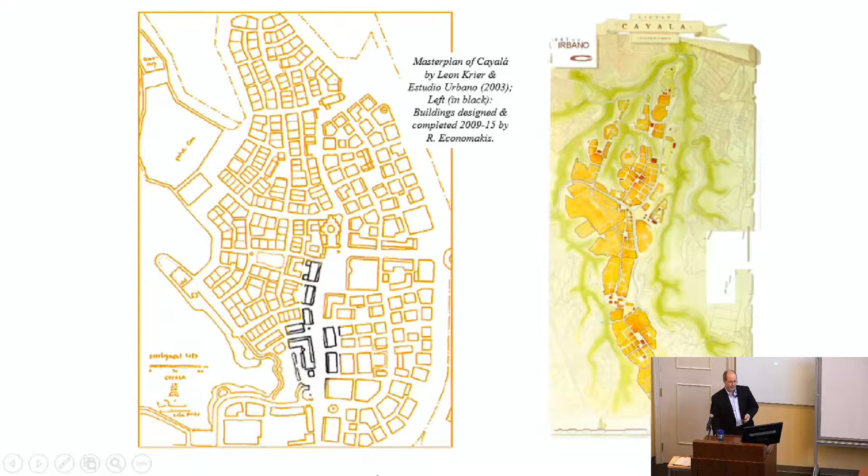So rather spectacular views, and that was something we had to take into account while working on the master plan. The drawing on the left is the interim master plan developed by Krier with Estudio Urbano, and the buildings in black are the ones I had the privilege to work on, including the first of a series of public buildings, located here, with a view over a ravine to the city of Guatemala and beyond.

So I will show you some of these images. It's important to bear in mind, since the necklace of hills or peaks along that ridge is north-south essentially, that the parti, the diagram of this new neighborhood, is linear, and it's based on three nodes.

A market tower, roughly down here, which Leon Krier proposed and which is still intended to be built. The Civic Hall, which is the center of public activity, which I will show you shortly. And then the church, which I'm happy to say is now under construction. I know this from an enthusiastic call from Maria, who's been struggling for a long time to get this realized, with all sorts of issues to overcome.

Here is the more complete master plan, perhaps the more recent one, of this new neighborhood, Paseo Cayalá. As you can see, you have the market tower by Krier, the Civic Hall, and the church, forming the main paseo, which is the Spanish word for promenade or main street.

You can see there are a number of existing highways in the area, from which they've designed entrances to the site—one at the south, one on the east, and one at the north end.

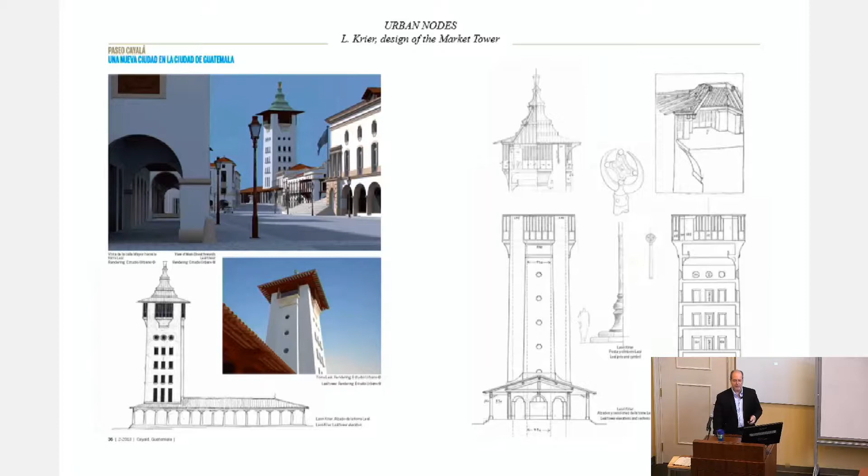The Krier Tower is going to be a very prominent, tall, and distinctive building type that's inventive, but it also transforms familiar Guatemalan symbols, like this grated window that becomes a columnar element on the facade, or this Mayan-like hat which goes on top of it. The intention is to speak to both the Spanish and native traditions of the land.

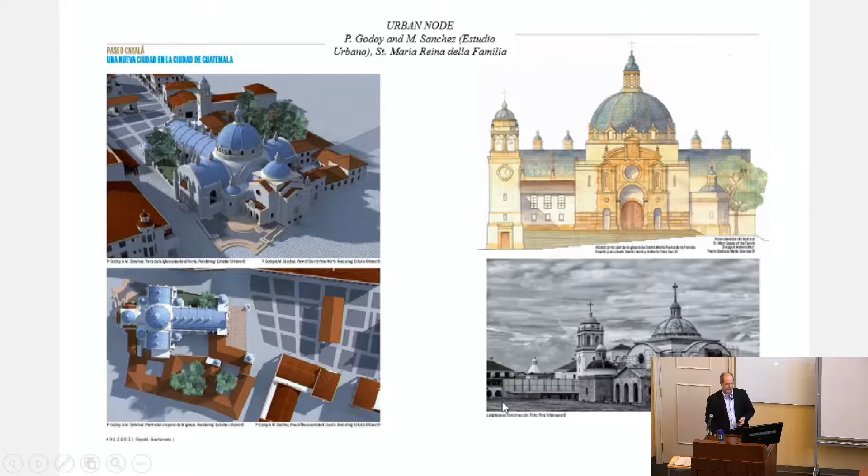I should get more pictures with people around. Common mistake architects make, by the way: you always photograph your buildings without people, and lay people always tell you, can you please put some people in them? So I've been a little more careful since then.

I also wanted to point out that in some pictures you'll notice the buildings don't have the proper moldings. That's because there was an inaugural event back in 2011 for the complex, and the moldings weren't done, so they put up fake moldings that weren't even painted. So when you look at pictures from that time, the buildings look a little unfinished.

Guatemala had a terrible civil war not that long ago. Very recently it was essentially the haves and the have-nots, but basically it broke down to the Mayans and the Europeans. They're going through a period now of great unity and purpose, and the owner's family hails from both ethnic groups, European and native, so he very much was looking for something that could stand as a symbol of the unity of Guatemala, that people could rally around rather than Spanish or Mayan.

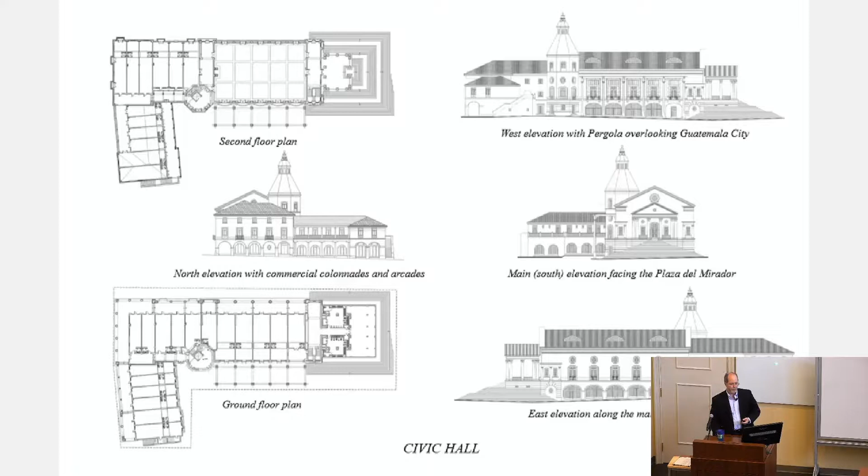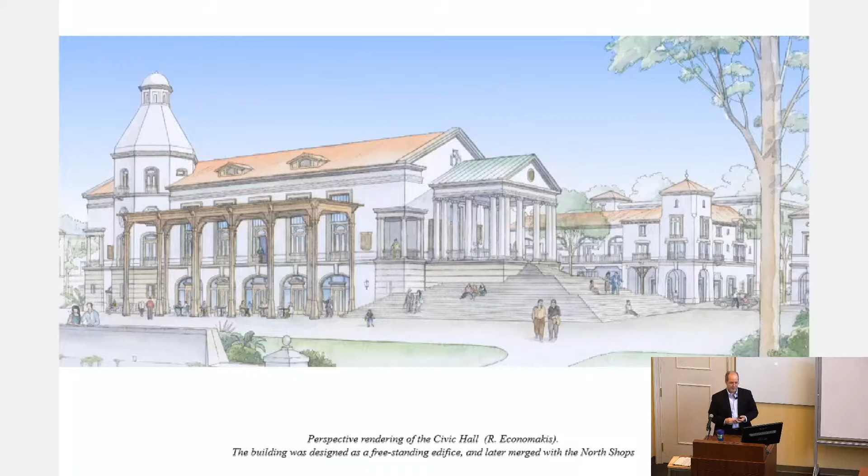This is the first perspective I shared with the client way back during the charrette, and you can see that it was still a freestanding object. He was taken by it, and that's one of the reasons it survived the first charrette.

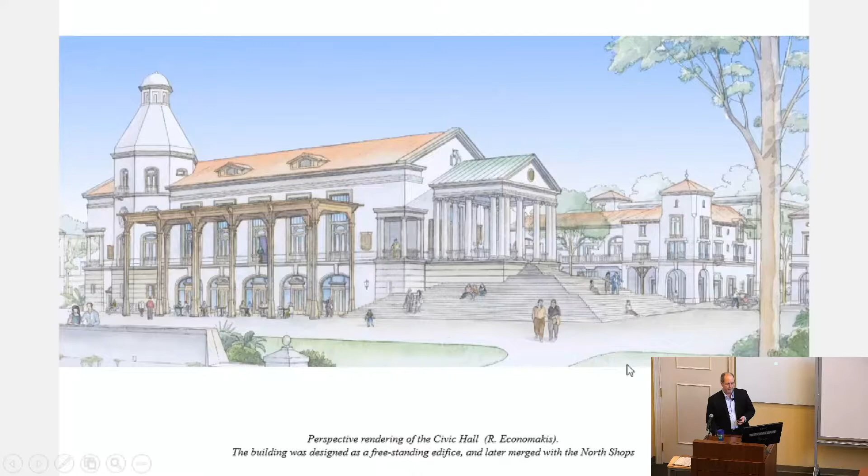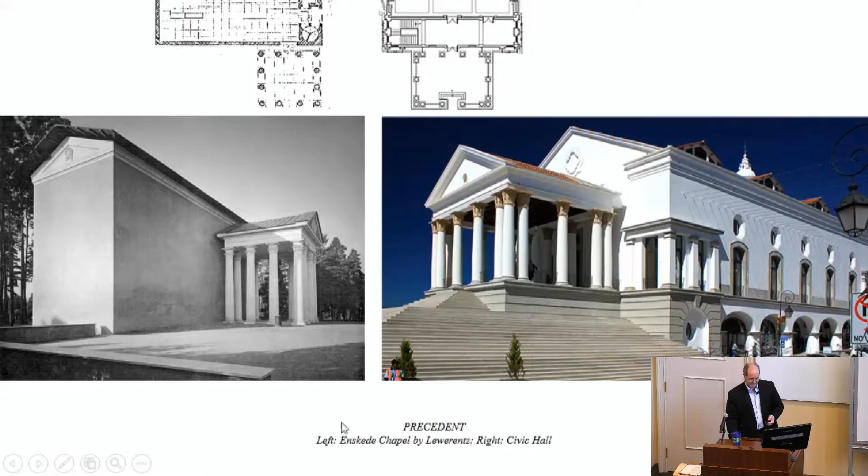And that shows you the pavilion. Again, the faux molding isn't quite done yet in this picture, but you can see how it had to attach.

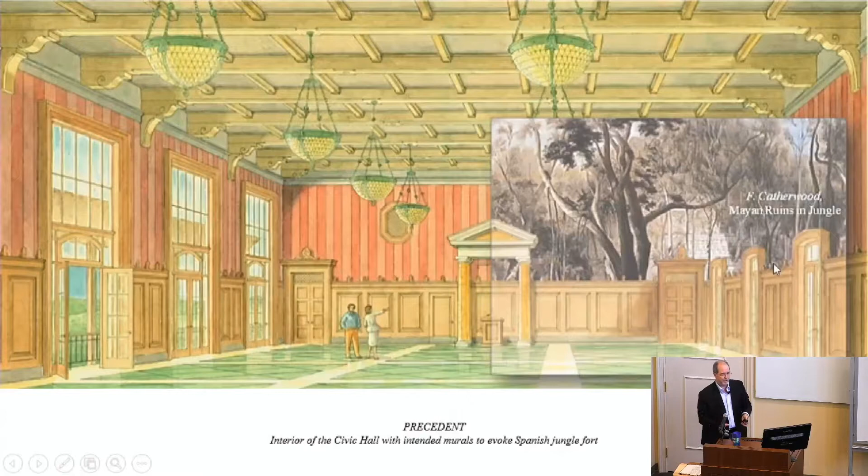The client every now and then nods and says yes, they'll do it, but they're looking for an artist. I don't know—if anybody knows an artist who would have time to paint this, let me know.

And these are just construction drawings that were shared. Now, the method of working was I worked traditionally, manually. I produced the working drawings, some of which looked like this.

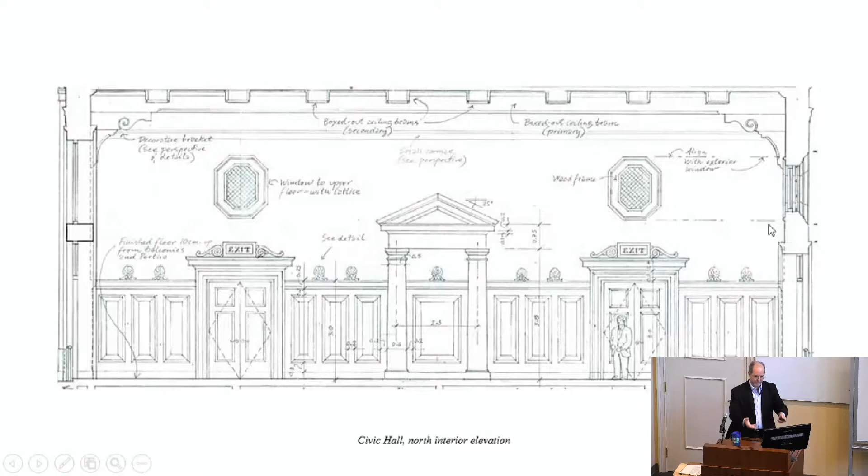They were then translated by the client's in-house architect, and usually they were butchered horribly, so there was a very laborious redlining process, which was very stressful and time-consuming. That's all changed now because the client realized there was just no way to go forward. So, as Frank Hutterwitz, who's with us here, knows very well, having assisted with the recent work, it's all being done this way, then translated by our team into computer drawings.

But inevitably things go wrong, and you have to be very vigilant. These are images that were scanned and sent to the client in desperate attempts to repair things that were going wrong, explaining what a pediment is, and how it should be, what that split fillet really is.

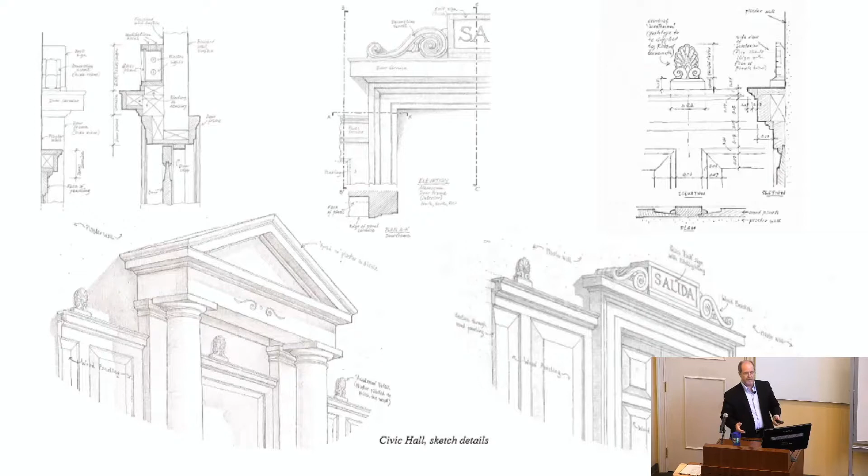Brackets and such. And I soon discovered in my frustration that the one thing they have in Guatemala that's fantastic is amazing carpenters, unbelievable carpenters, and I'll show you. They took these drawings and they did better than anything we architects could conceive.

So, giving them a picture of the Parthenon acroterion—this was originally called the Athenaeum, so the reference to the Parthenon was deliberate—they did a better job, I think, than the original drawing I sent them. And then the brackets here for the ceiling, beautifully executed, unbelievable.

Yes, the bases were round. This is Tuscan, that's the Edicule. But if you open book 4 of Vitruvius, he describes the Tuscan as having a round plinth. It was a mistake, but it's legitimate, I guess.

So these things happen. Another thing that was a lot of fun was contemplating the capitals as a symbol. They were meant to be Ionic at one point, then Corinthian, and once they became Corinthian, the client was asking, well, how can you make them very Guatemalan? The answer was, just go to the museums and you'll find representations of corn all over—their maize god, I forget the name, but at any rate, that was a big deal.

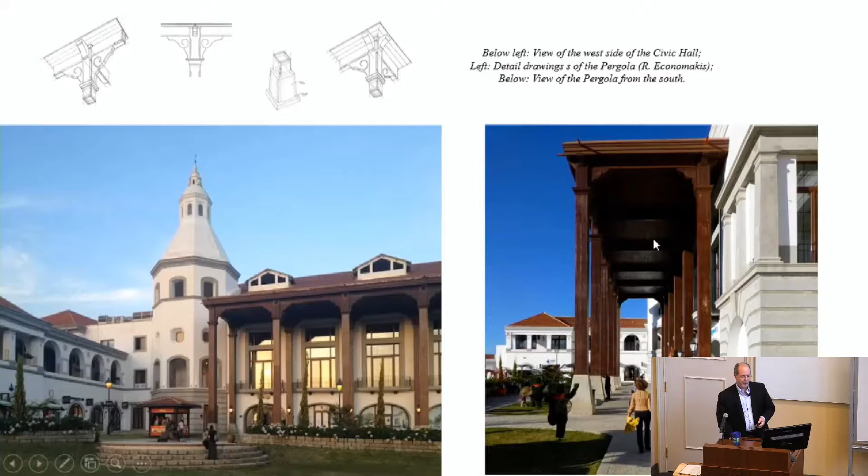They tend to be focused around main squares or courtyards, but this one was bigger than anything that had ever been built in the history of Guatemala, so something had to be done. And it just so happened, we were back and forth, that when I first got the summons to begin the design of this building, I was in this hotel in upstate New York.

Looking out the window, I sketched this bracket, which ended up being what we went with. The client loved it—there's a little bit of upstate New York, kind of grand old Victorian hotels, in there. It's okay, they loved it because they thought it looked very Guatemalan. I said I had no idea how that happened, but at any rate.

So these buildings were interesting because, with Pedro, Maria and Leon, we came up with a kind of palette of architectural motifs that we would reference. The country is full of beautiful pergolas, but there are no buildings of this type—this mixed-use type with pergolas along the street does not exist. This is a brand new type.

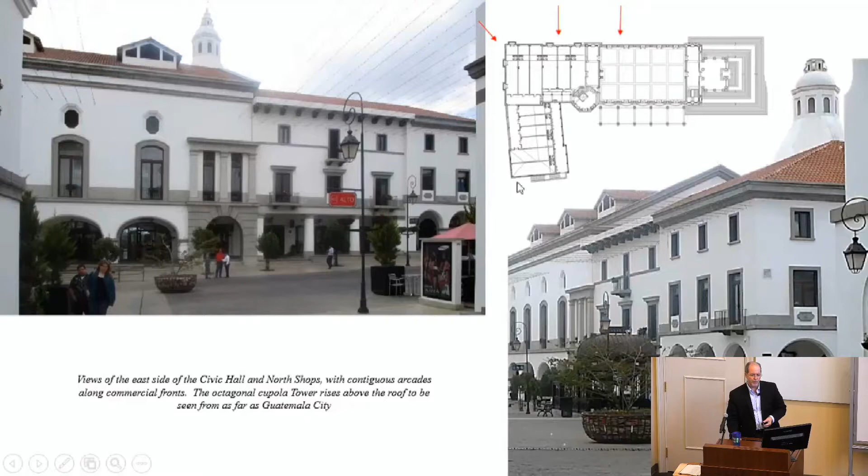If we walk north along the Civic Hall, you can see this L-shaped series of shops, which we call the North Shops, which are really part of the Great Hall complex. They've been broken down into very distinct buildings. I was asked to make them so that three bays could potentially be purchased and acquired by an entity, and so therefore it would want to look like a single building.

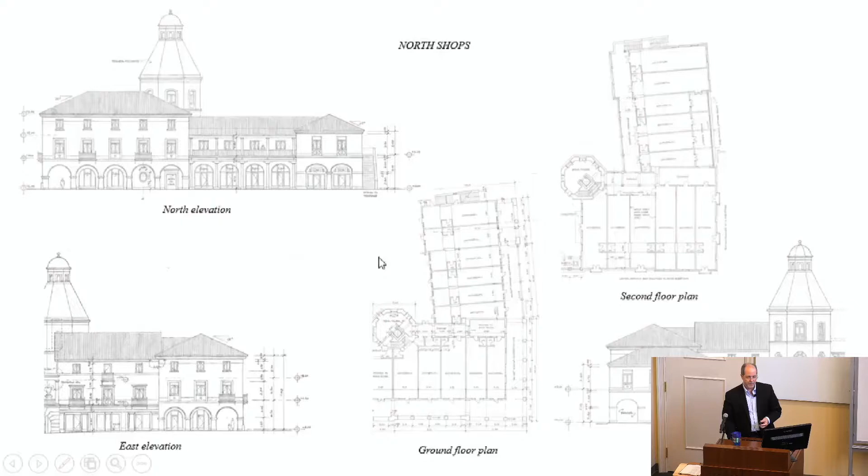Here are the original drawings before they were translated digitally. You can see the pencil work here. They survive pretty intact. And then here, views on the north side, turning the corner.

The colonnades are continuous. In Guatemala, it rains every day of the year for about half an hour, very frequent and very brief. Shopping can be interrupted by this rain, so colonnades were just natural, and people found themselves asking, why didn't we do this 400 years ago? Why is it only in the public squares that this happens? Well, the answer is that's where the shops were located, so it makes sense to extend the typology along the street edges wherever there is commercial activity.

These balconies were meant to be wood, but they were cast in concrete. And the columns—here's some sketches, sent urgently to the folks there. Obviously one can't constantly travel there, so there's a lot of scanning and sending just to explain exactly what is meant when handling corners like that.

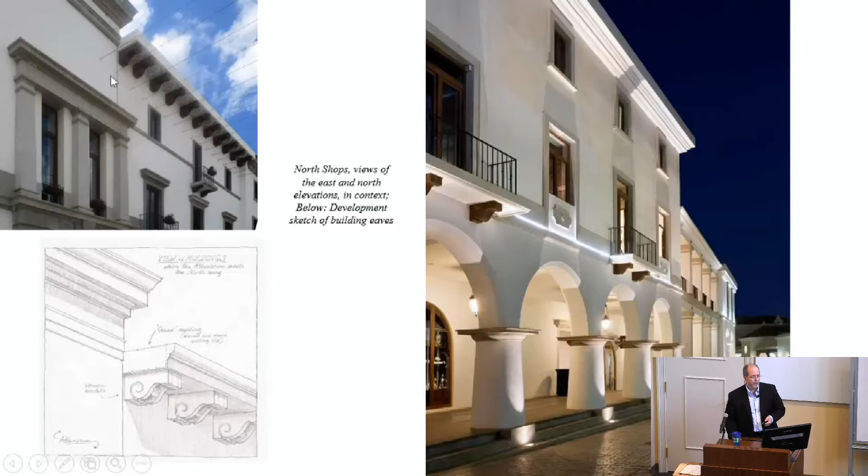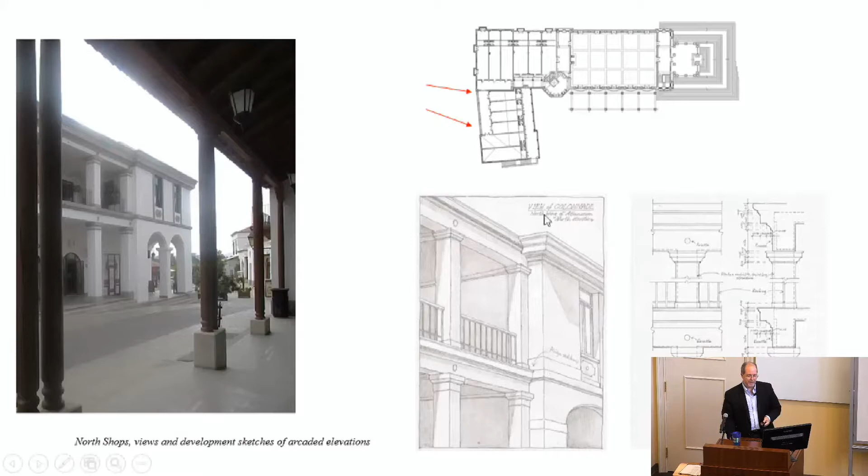More North Shops, more development sketches—if these kinds of drawings weren't made, they wouldn't have understood it. That's the thing you have to realize if you're a student planning to be an architect: the ability to sketch is one of the best skills to develop, because you'll find all sorts of misunderstandings cropping up on sites if you don't have total supervision. The ability to make a quick sketch and send it to them can sometimes save the day—when they see this, they'll know exactly what to do.

And then another colonnade there. As Caroline mentioned, we were lucky to get a Palladio Award for this, and publicity.

Let's walk north of the Civic Hall now to this building here, which is J4, a corner building with a tower to serve as an urban node, easing you into the main square with the Church of St. Mary that's under construction.

This row of buildings right to the tower are the ones that I was in charge of. You can see very quickly here some very early drawings of a house which didn't survive, but which the tower was adapted for the purpose.

Some more development drawings—this is the J4 and J5 buildings. You can see it's again this sort of playful mix of sheer plaster walls and timber work. That's the beauty of the Spanish tradition, which I knew nothing about until I went to Guatemala: it's this incredible vernacular architecture that has these classical moments that just burst forth upon the wall.

You'll be going along and get all these sort of undulating, simple surfaces, and then suddenly there's this concentration of formality that happens around a doorway or even a window.

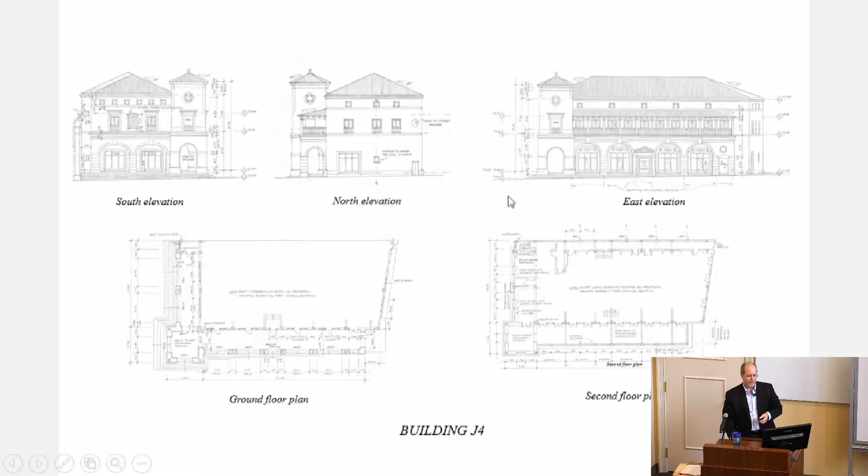So the next building, J4—this is J4, J5 I should say. Where am I going backwards? I guess, yeah, J5 here.

The trick to avoid the horizontality of this was to extend the columns down onto brackets, and that overlap creates that sense. I'm fairly happy with the result of verticality where it was counterindicated by the architecture.

This building had an amazing view beyond of the volcanoes, so of course the windows were all about capturing that view. There's a nighttime shot there of the town in action. I find these things online, they're amazing, and better photography than our own.

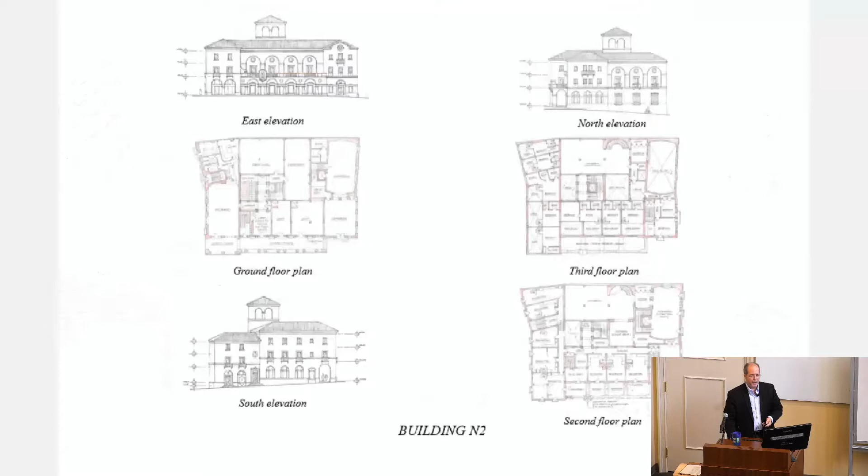The last building in that sequence faces the public square where the church will overlook. These are various development sketches for a tower, but the problem was, we want a tower, said the client, so we can view Guatemala City, but it should not compete with the bell tower, because that's the church, right? So this exuberant first start was nixed, and it became a rather plainer affair.

So I derived a little bit of the lost fun by just concentrating on some of the smaller chimneys that were built.

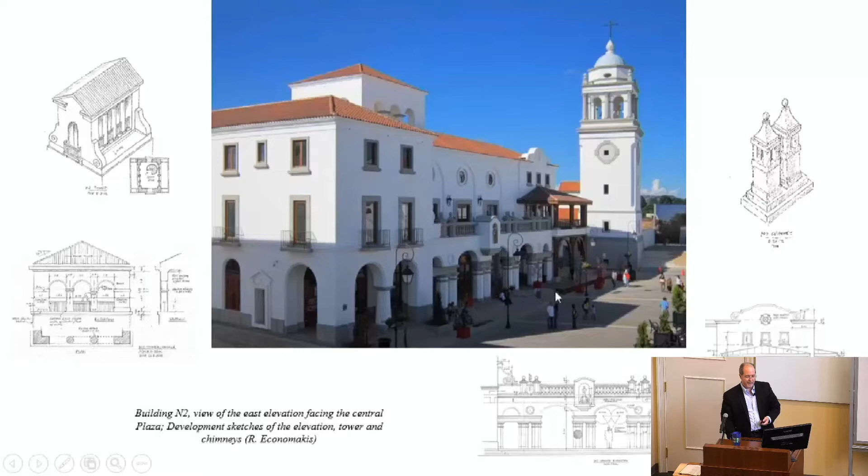This building was designed to front a square where the church overlooks, and we agreed it would have a little niche. Maria Sanchez promptly found a perfectly sized statue of Mary and put it in the niche. I don't know where she found it, but it fits perfectly, overlooking. Below there are shops and apartments above.

This is the square, where the church will be located. There's a bronze statue of John Paul II. You can see here the buildings I just described, and the volcanoes in the distance.

Constant emails back and forth coming in saying, quick, we need a scheme because the owner of the restaurant downstairs has done something horrendous, just put a bunch of umbrellas, and there's all this constant sketching that has to take place.

We even did a sketch for a fountain. I'm not quite happy with the results, but this was based on a Turkish fountain I'm familiar with in the town of Nafplion. Michael will probably immediately recognize it.

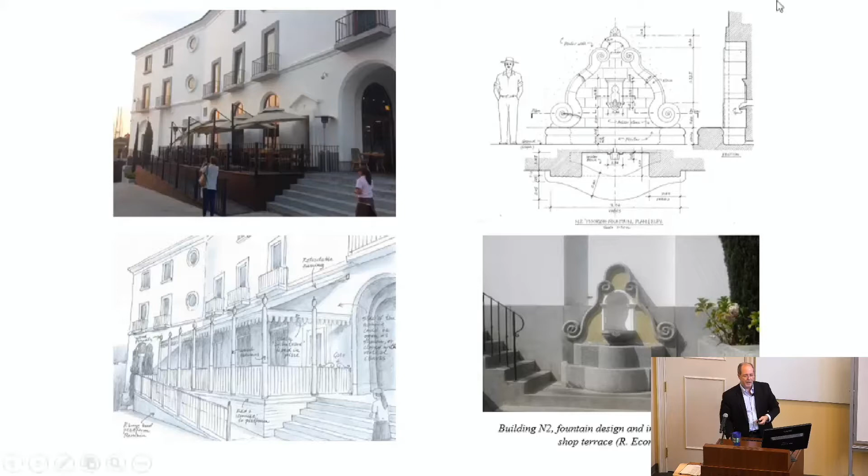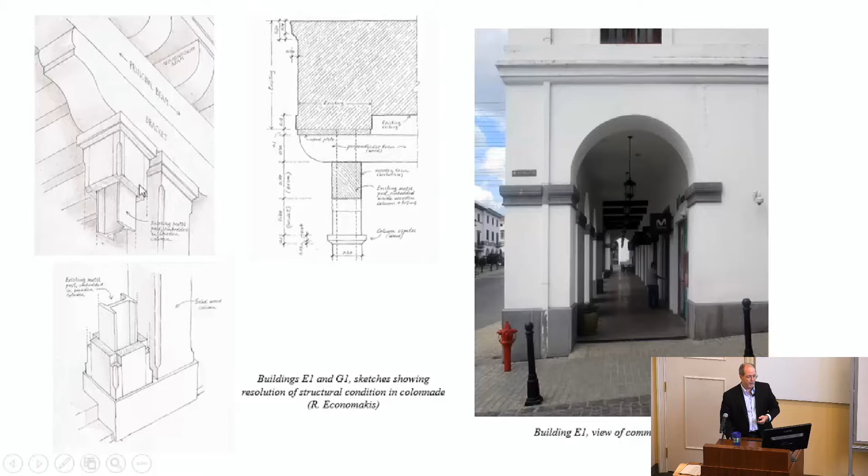Then two other buildings really quickly up the Paseo, which were the first attempts to define a mixed-use type with the colonnades. You can see the sketches explaining the structure, how it'll be clad, and how it will appear. It's a concrete slab, but we wanted to dress it with wood so it looked structural.

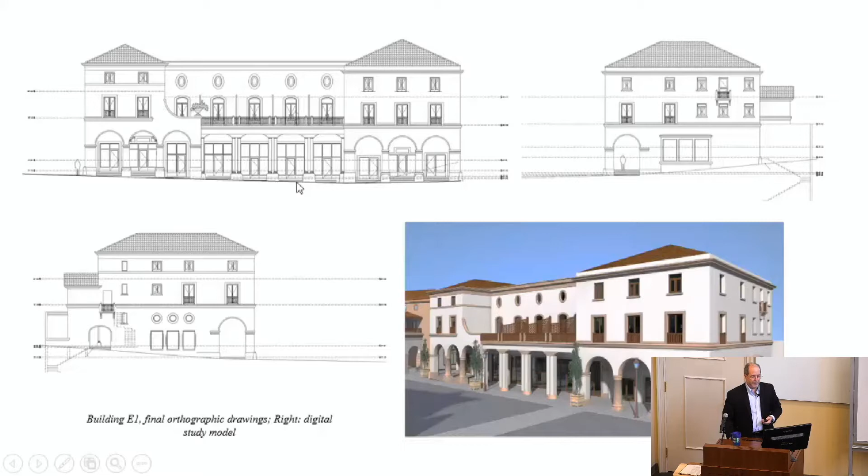Then an example of computer-generated drawings done by the in-house architect, and one other last building on the Paseo, overlooking the little square by Krier, with the penthouse at the very top and various Guatemalan details.

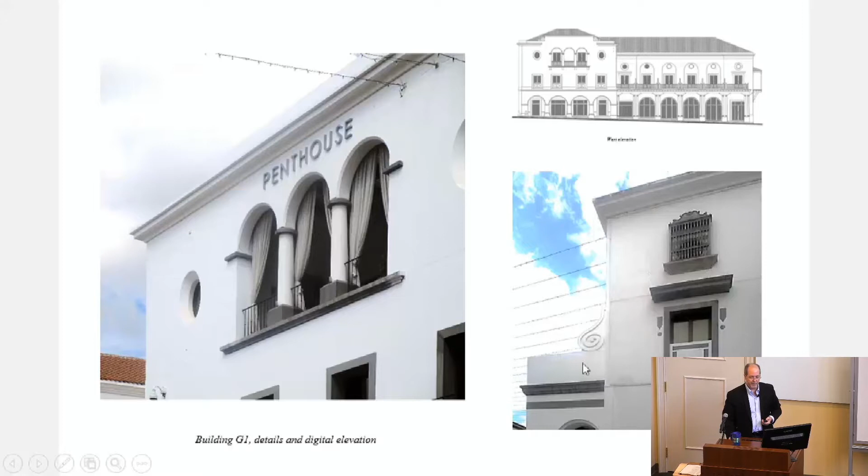The painting was a surprise. Last time I went, some local person thought they should do it, and you kind of let these things happen and it just evolves. That's the fountain designed by Leon Krier.

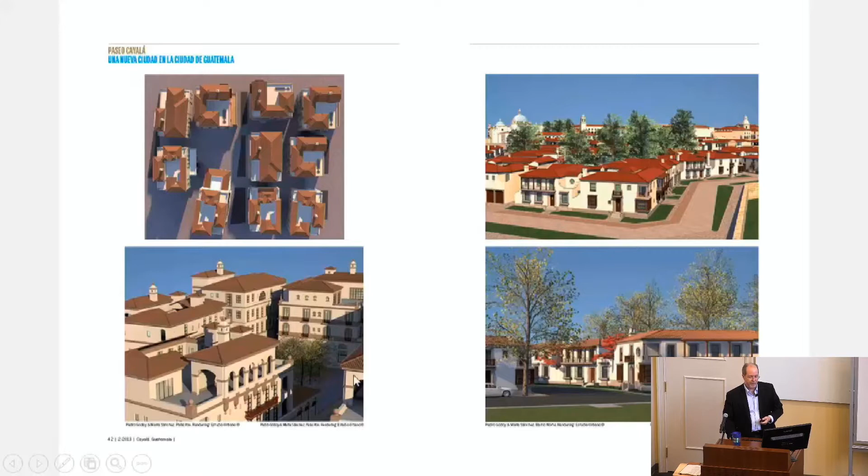Here are some recent projects extending out to the north and west of the town, largely Maria and Pedro with Leon's designs. And these are the urban awards the master plan received, IMCL, the Acanthus Award. Now, last three slides, very quickly.

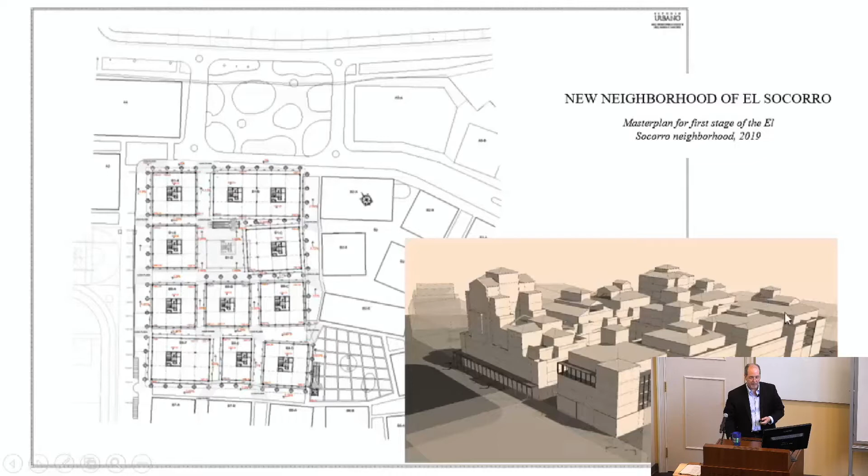The neighborhood of Cayalá is here, along that necklace of neighborhoods. That other neighborhood now under development, the El Socorro neighborhood - Frank Hutterwitz has been working on this with me together, and this is the first urban quarter or area to be built facing a public square. These two buildings here were the ones we worked on, and you can see how it's developing based on a grid.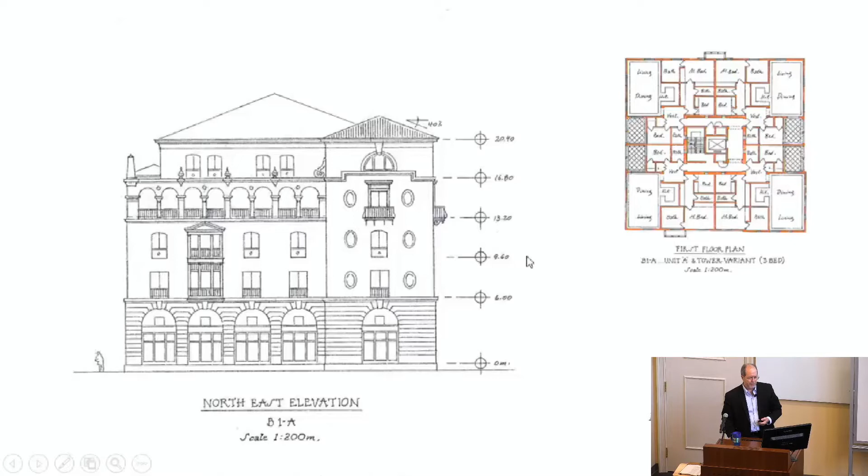These are drawings - I'm not showing the digital drawings quite yet, but you can see here the design for the one facing north, building 1A, and then this is a larger building to the south, building 8F.

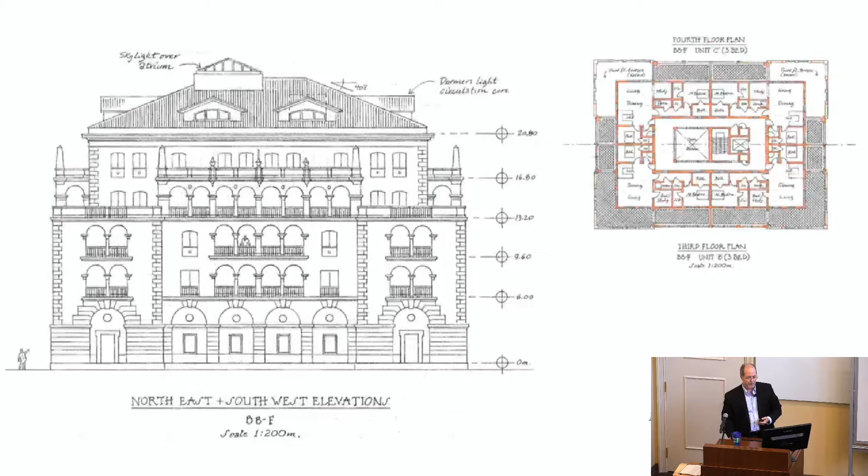And that's it. I realize it's very little time and we have to start getting ready, but there's 5 minutes left, I thought perhaps - unless, because I don't think we're as rushed as we were. So I thought I'd end there with a painting by Frank Catherwood, but I'll be happy to take you back.

To a more general view, just to show you there. So if anyone has any questions, I'll be happy to answer.

Yes? It sounds like there were some kind of on-the-fly architectural changes. I was wondering if there were any changes in the master plan after the buildings started getting built. Was there any iteration? Yeah, that's a very good question.

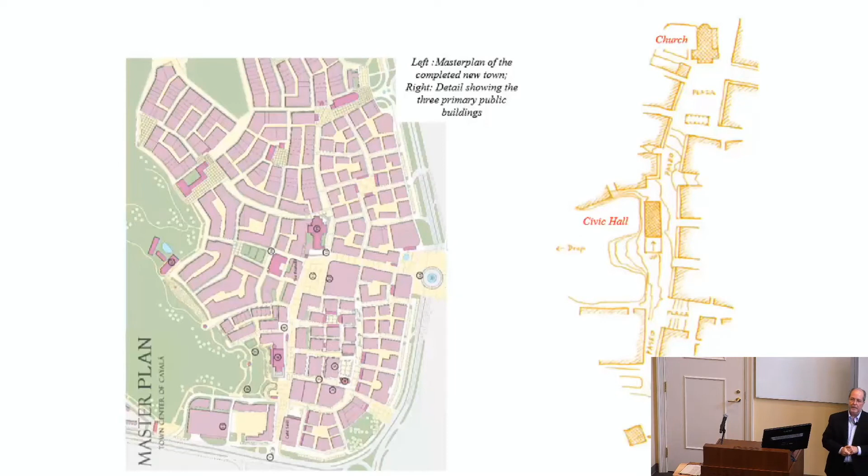There are some things that are maybe a little unfortunate. The client said they're very Catholic, a very devout family—the owners. Their money comes from sugar plantations, so they're kind of driven by this sort of moral vision. Hector Leal wanted 10 to 15 percent of this development to be low income, which is how we designed and designated it.

But before anybody could realize what was happening, that was all bought out by people who could afford it. So that is a critique—there should have been some way of halting the rush. People just wanted to get out of Guatemala City because it's crime rife and has its issues, congestion and so on, so it all got bought out real quick.

So that's a problem of new urban developments, period. It's something for you all to be careful of. In England, 10% has to be designated—anything you build, if it's an urban development larger than a certain square footage, at least 10% has to be affordable housing, and they ensure that's what happens.

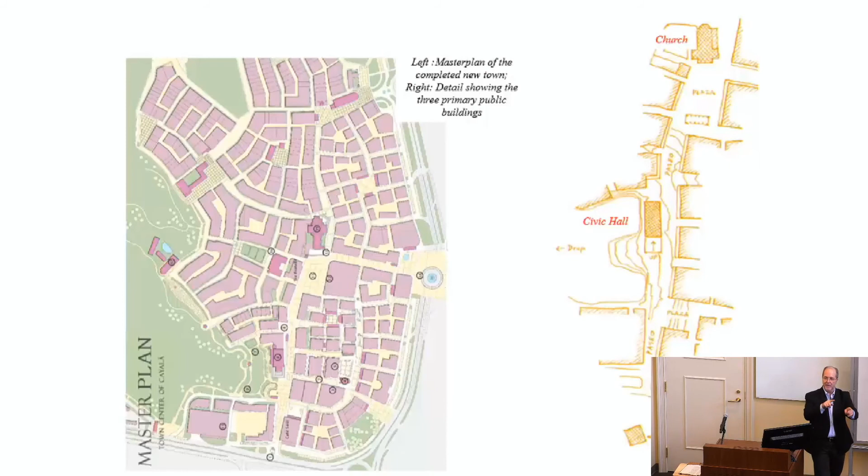Maybe the last one, because I've got a pin-up to go to. How was the car treated in the plan, as far as how everything plays out? Very good question—it's worth staying and missing my pin-up.

The car—originally we were all drawing sidewalks. One day Krier arrived from Spain on a flight and came to a charrette, and he said, 'what are you doing?' We said, that's the master plan. He said, 'get rid of the sidewalks, it's all a sidewalk.' I said, 'you mean no cars?' He said, 'no, cars wherever they want, and pedestrians wherever they want. Just get rid of all distinctions.'

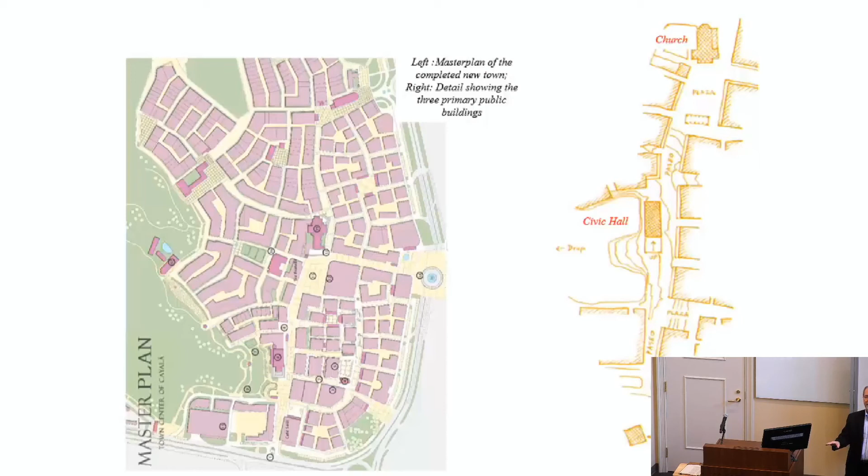We thought this was mad, but the client finally relented, and they paved all the roads with cobbles. The cars, the minute they leave the highway and enter, just inch along, terrified they're probably driving on some pedestrian road, and they go very slowly, and everybody's happy. There's a natural speed control that happens because of the texturing of the road—the cobbles are deliberately rough so the cars can feel it and slow down. It's an amazing device.

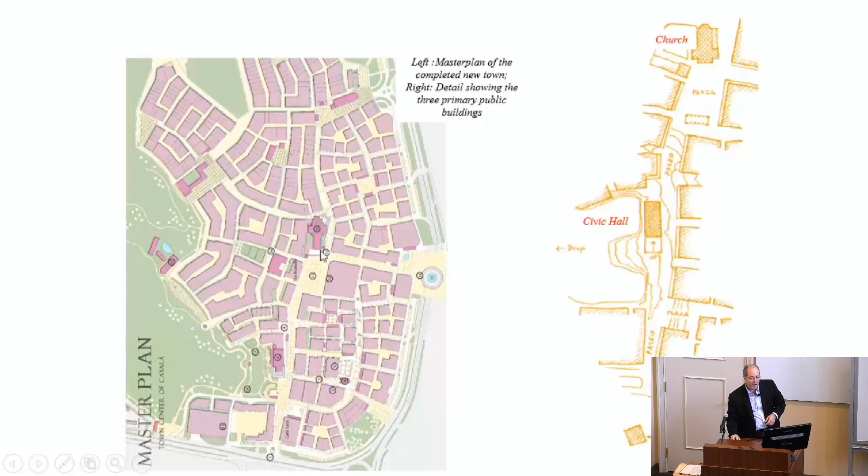The pedestrian feels that it's their land, it's theirs to use, and the car is an intruder. It helps that underneath the whole place, most of the buildings have parking below—it really helps. You go under, enter parking in a number of spots. Here's one, there's another, I forget, but it's incredible.

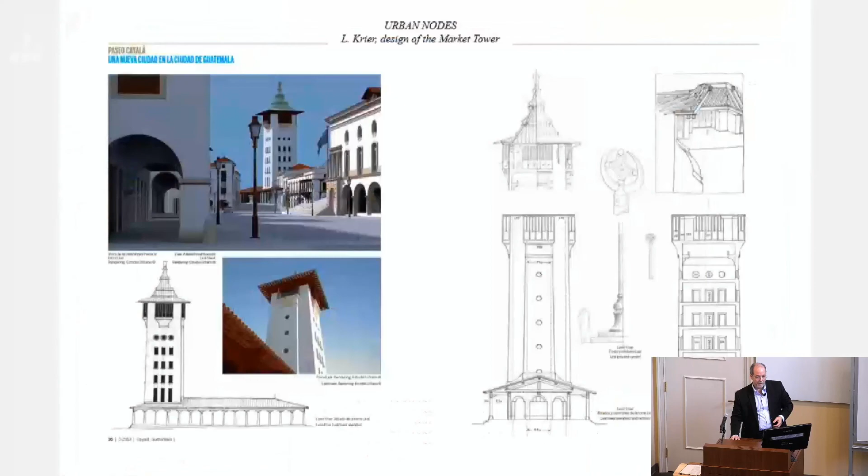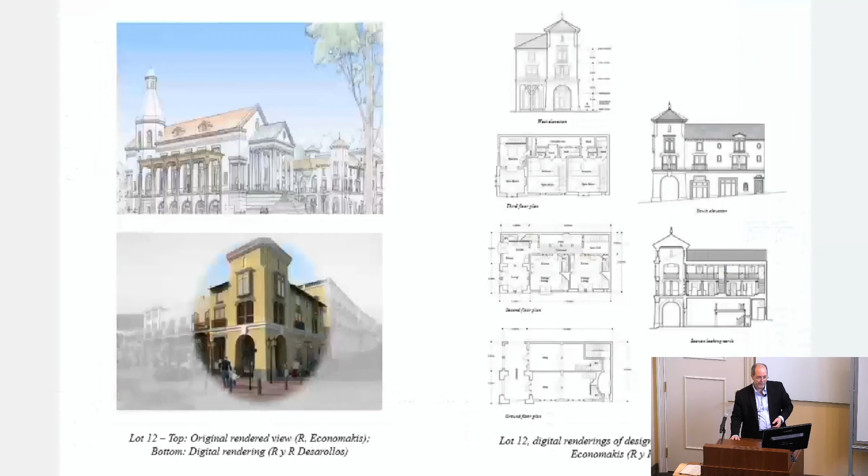And you surface in these beautiful little pavilions. Where are those pavilions? I'll just show you one, a little underground pavilion—I think it's here. Yeah, I believe that's one designed by Maria Sanchez.